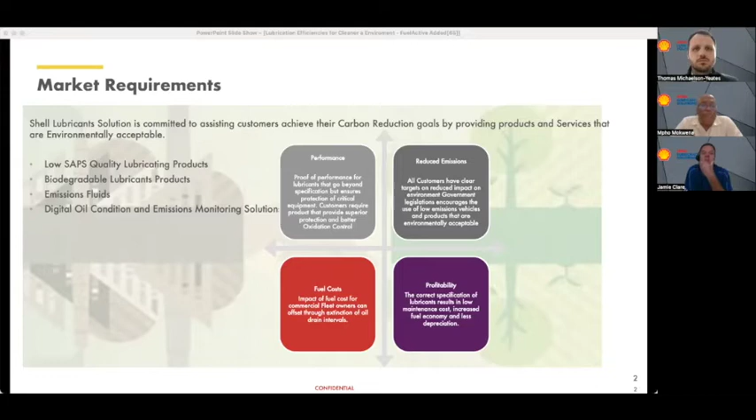As Shell Lubricant Solutions, we are committed to assisting our customers to operate efficiently and optimally, whilst also maintaining performance, reducing emissions to help them achieve their sustainability goals, and maintaining profitability, which is very key in the current economic climate we find ourselves in. And the rising fuel cost means that customers are constantly looking for other areas where they could record some savings. Shannon, if you can move to the next slide.

In Shell Lubricant Solutions, we have solutions that support our customers' operations to operate optimally and sustainably while reducing their total cost of ownership. Core to Shell Lubricant Solutions, we have a portfolio of services that addresses specific problems or specific challenges that our customers face on a daily basis. And this starts with the packaging of our products. So we have products that have a net zero carbon footprint in terms of packaging and also the formulations thereof.

Our packaging solutions mean our customers can claim the carbon reduction points that result from using carbon neutral packaging and solutions. Our services solutions are designed specifically to enhance global lubricants best practice and reduce oil and grease consumption. This also improves the customer's bottom line by improving their profitability. Very important for all our customers is to always have their equipment available for production and operations. So through Shell Lubricant Solutions, we are able to provide solutions that improve machine availability and reliability.

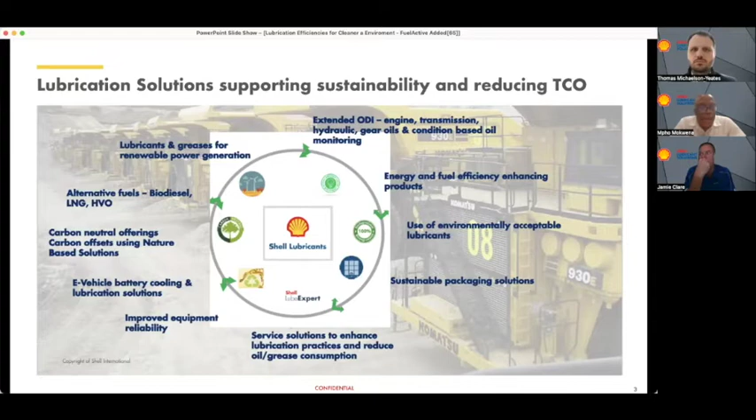Thanks guys. My name's Jamie, based in London in the UK, and I work as part of a global team. My current role is product application specialist for services. So to give you a quick recap, the way Shell are working at the moment is we're moving away from just being an oil supplier. We want to work more closely with our global and key account customers to look at not just selling you an oil, but also selling you a service. And essentially the whole thing is underpinned by sustainability.

A key lever for this is essentially trying to work with customers to move away from what we call historical or normal OEM limits for oil drain intervals. And yet the whole digital solution space is moving very quickly. This is only an area I've been involved in the last couple of years. Before that, we were more focused purely just on the lubricant.

As Mpho briefly discussed there, we've been working closely with engine manufacturers as an example to see how we can drive down viscosity limits to really push our products to the next generation. We all know that rising fuel costs are causing our customers real problems. So essentially what we've done now is we've got the lubrication nearly as close as we can to the limit in terms of increased fuel economy, but also underpinning that by giving customers still the same level of wear protection, which is quite difficult.

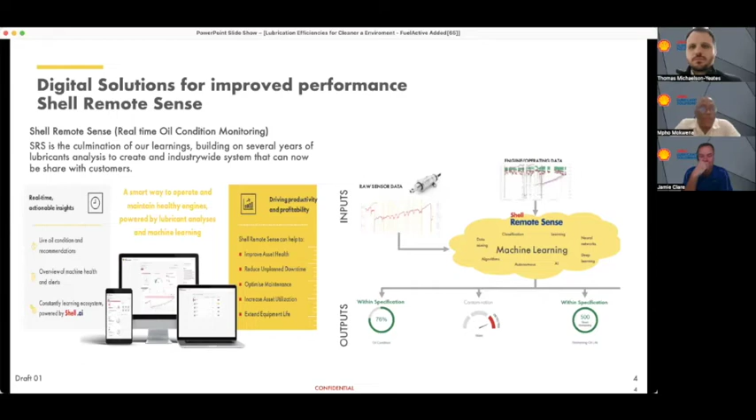I think we'll move to the next slide, which speaks to pretty much the same concept, but with emissions management. Also a solution that we're working hand in hand with one of our partners, Oren, to provide emissions management solutions. This is also very data-driven, in the sense that sensors are installed in the customer's operation to check what their daily emissions are, and we help them manage their emissions and carbon footprint, and also help achieve their sustainability objectives.

It's been tested through various customers globally, and it's something that we're also bringing into the South African market. As I said, this is in collaboration with Oren and IBM, a partnership that was established a couple of years ago. And this also addresses the need for customers and operations to go digital in terms of managing most of their operations. So we're moving into that space as well, to try and minimize as much as possible human interventions when it comes to emissions control.

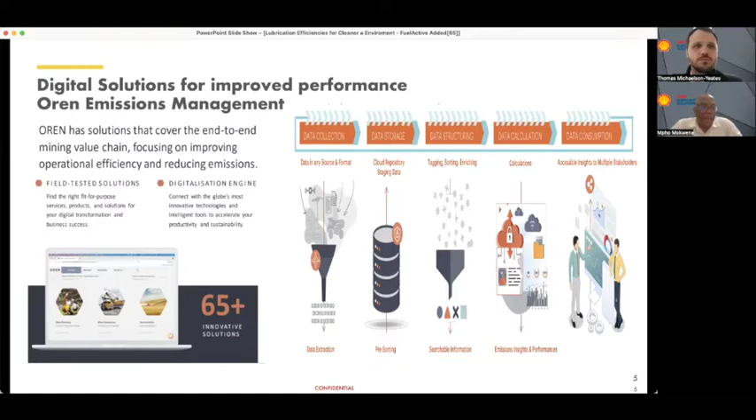Shannon, you can move to the next slide. As I said in the beginning, we're going to unpack some of the solutions. So far, we've unpacked two of our digital monitoring solutions in terms of emissions and oil condition monitoring. But all this works in support of what our core service is, which is the provision of lubricants.

The latest technology now in the market in terms of lubrication is our Rimula brand, which now has a CK4 specification. It's also carbon neutral in terms of packaging, formulation, and raw materials. This product has been in our portfolio for quite a while now, and it has been tested to reduce oxidation and oil consumption by about 39%.

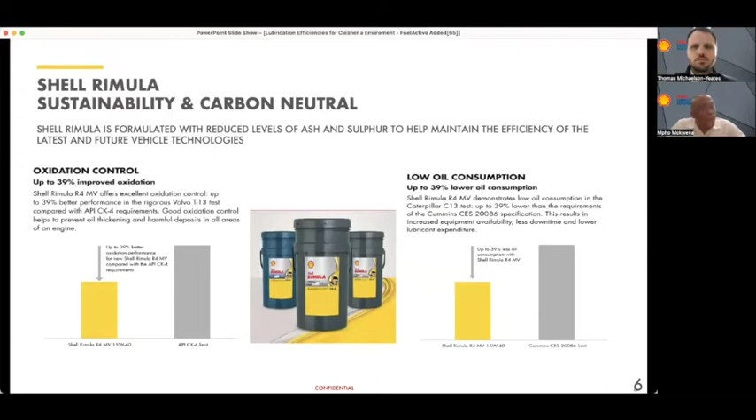In collaboration with our OEM partners, Volvo and CAT, we were able to do these tests, the oxidation and consumption test. Shell Rimula is also available within our portfolio. You can move to the next slide, Shannon.

Again, as we mentioned right in the beginning, our solutions are underpinned by the need to reduce our carbon footprint and be sustainable in our operations.

We all know oil, if it's not managed properly, 50% of it ends up in the environment, either through water streams or into the soil.

And this is why now we're introducing an environmentally acceptable range of lubricants, which is completely biodegradable, Shell Naturelle.

Essentially, all products that are in our portfolio, be it engine oil, transmission, or hydraulics, we have a biodegradable equivalence of this, and this helps our customers to alleviate the pressure of wanting to deliver more, whilst also contributing to a more sustainable and optimal operation.

Our products in the Naturelle range, as I said, are completely biodegradable, and are less flammable and less harmful to plants, animals, or water streams, where they might end up if not managed properly.

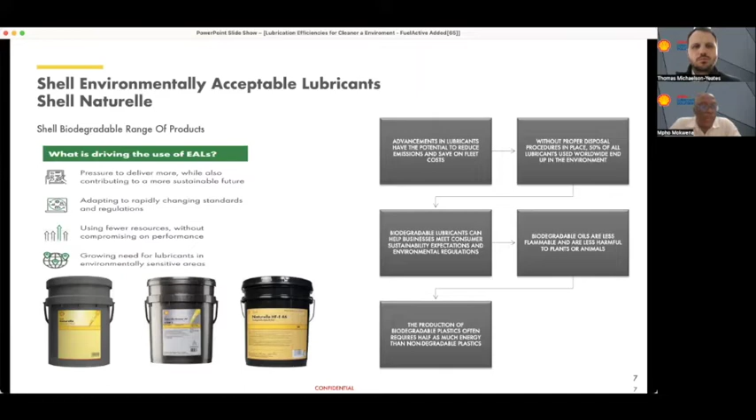Another product that's within our portfolio, I've also mentioned in the beginning, is our Emission Fluid. As you may know, most of the new technology diesel engines come fitted with the SCR, which seeks to reduce their emissions.

How AdBlue works is that it's injected directly onto the emission system of an engine, and it converts those harmful emissions into harmless water vapor.

AdBlue has been introduced since the introduction of Euro 5 and Euro 6 engines in the market. So we also help our customers through this product to reduce their nitrogen and carbon emissions.

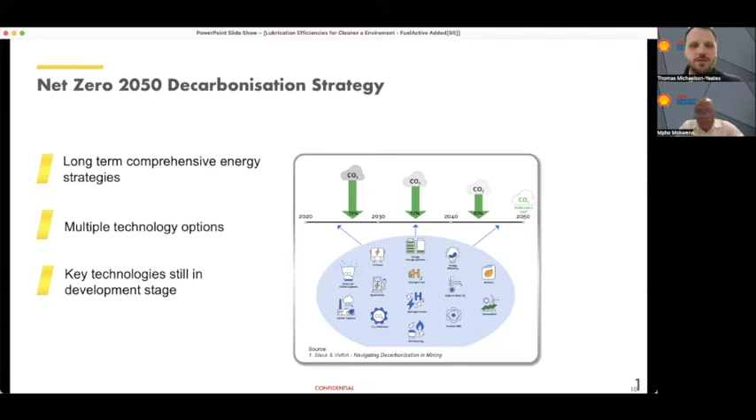It's interesting and important to understand that though these technologies at the moment are being piloted and tested, and they'll be available to be rolled out commercially before the net zero goal of 2050, they're still in development. So what we've got to do, it's still important to look at where we are today with the diesel, fuel and energy situation in mining.

And it would be pretty similar to any mine in South Africa, if you looked at Sishen or Mogalakwena or any other mine, that if you look at what is the main energy source on a mine, it is diesel, predominantly in the mobile assets, such as the loading and hauling phase.

As we speak at the moment, according to a McKinsey study, we've got roughly just over 50,000 90-ton diesel haul trucks around the world operating in mining and other industries.

So when we look at what we need to achieve as an industry in mining to get all those trucks over from diesel into completely net zero technologies such as hydrogen, we understand the task that we've got on our hands. But we also understand that actually that's not going to happen overnight.

If you take Australia as an example, in the Pilbara region, the diesel that's burned annually is the equivalent of 600 million trees. So if we leave that for 20, 25 years as we move to hydrogen and don't look at other technologies, such as the ones we've been discussing today, to reduce that, then we're still seeing a massive effect on the environment.

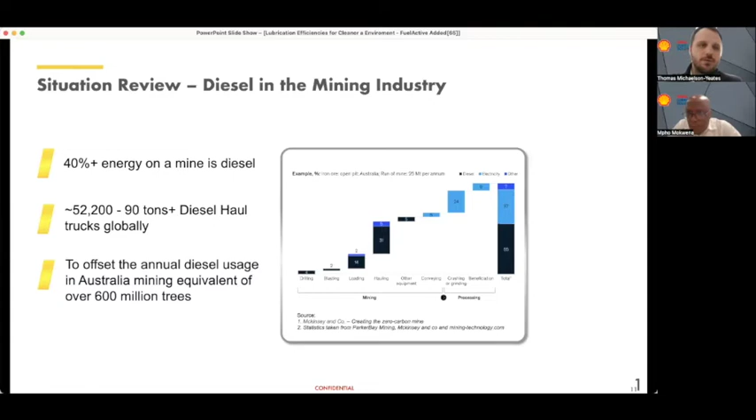And if we just flip to the next slide. So for me, to understand how we look at decarbonisation, we've got to look at it in two ways. One is obviously what all mines are doing at the moment, looking long term at how we accelerate these technologies that bring us to net zero, such as hydrogen, solar, etc. But also short term, how do we look at different technologies, be it mechanical, chemical, digital, to help us reduce the impact of burning diesel?

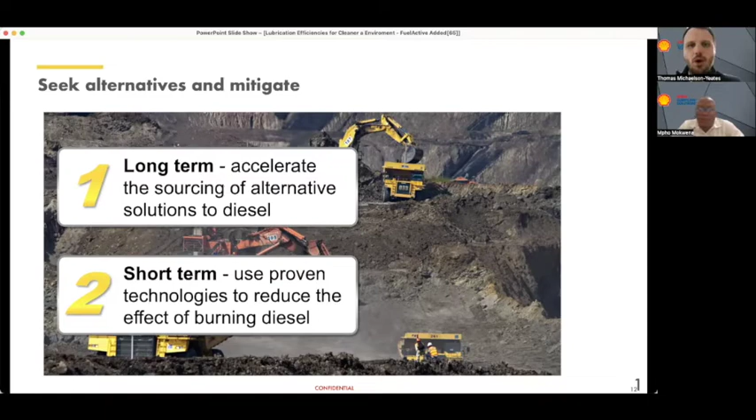If we flick to the next slide. I'm sure there'll be arguments from people that would add other buckets to this, but I kind of put them into three main buckets. The first one being different fuel sources that are available today, and that was discussed earlier on the webinar. There's biodiesel, and many others available today that I know Shell are selling to different companies in countries around the world at the moment, and the benefits that they have above just diesel.

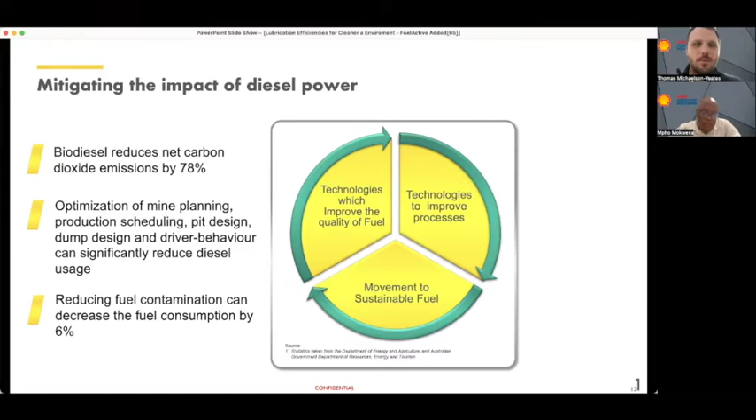Then you've got how can you make operational changes on the mine? That might be a digital solution such as driver behavior, remote sense, to trolley systems on a mine, and anything you can change to actually change the process on a mine. And then the last one is how can you look at the quality? How can you make sure the quality of fuel that's going into the engine is at the highest spec, therefore meaning that you actually have to burn the least amount of it to deliver exactly the same output. And from a FuelActive perspective, that third bucket is where we sit.

And if you just flick to the next slide. So just to zoom in here from a technical perspective, if you look in the top left picture, what you're looking at is a new injector. And on the top right, you're looking at basically a worn injector, but not an injector that you would probably replace on a mine, because otherwise you'd be replacing injectors every 1,000 hours, and that's not financially viable on a mine, because your equipment would be down all the time. However, because of the contaminants from water and dust and other things that get onto a mine, what you're seeing is that's happening too quickly.

And when you're getting an injector that's having small levels of contamination in it, what you see is it doesn't run to its optimum level. And when an injector doesn't run to its optimum level, it doesn't mix, it doesn't evaporate, it doesn't combust, which means that to get the same level of output on your equipment, you're actually having to burn more fuel.

And the outcome of having to push more fuel through it is, one, obviously your fuel cost goes up because there's more of it. Two, the big one today, from a decarbonisation perspective, you're actually burning more fuel, which means you're putting more into the atmosphere. And the third one, you could get a power decrease on your equipment, and the only way you overcome that is putting more fuel through it, which goes back to the first problem.

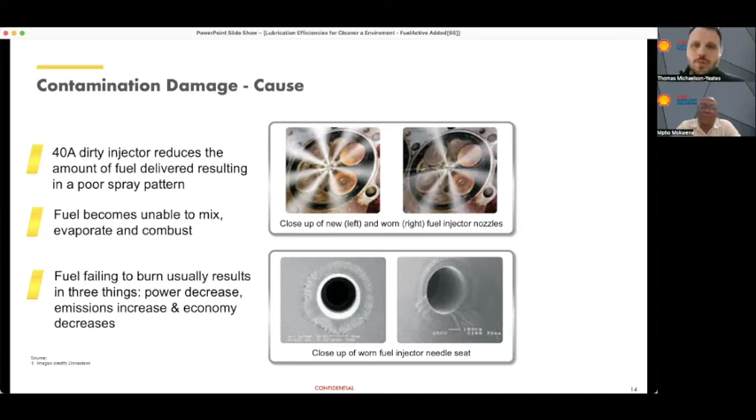If you flick to the next slide. Normally I'd show this in a video, but for the webinar today I'll just talk through where FuelActive sits and what we look to do. If you look in the first box, what you're seeing there is a standard fuel tank and the breakout of fuel within a fuel tank. At the bottom, what you get on a mine, even with really incredible fuel management processes at large mines and customers around Africa and across the world, is that you do struggle to remove all forms of contaminants, such as dust, dirt, rust that you see in the mining industry. And the next layer up, what you see is water.

Water can come in via weather, but the main way water comes in is via the temperature difference between inside the fuel tank and outside the fuel tank, creating condensation inside the tank. And however strong a fuel management process is on the mine, that is near impossible to remove. And then on top, you have the cleanest fuel. And even during the high levels of agitation that you get with mining, moving vehicles, and happy to send this over to anyone after the webinar, it's still really interesting to see how that clear difference sits between the water and diesel due to the weight difference.

In the second picture, what you're seeing is a standard fuel pipe that generally comes from the top of the tank and sits within a few centimeters of the bottom of the tank. With a standard fuel pickup pipe, because it's basically like a straw, it creates that pressure point around the bottom of it. By creating that pressure point, it always sucks from the bottom of the tank and sucks the heaviest material into the fuel line, which means that even when you're looking at a diesel tank which has predominantly 99% clean fuel in it, and only the bottom 1% has a level of water and contaminants in it, that's the first material you always suck up into your fuel line.

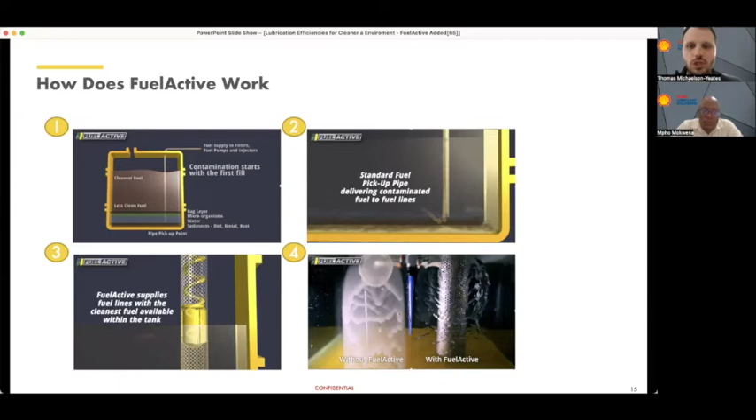And then on number 4, what you're looking at there is, in our innovation centre in the UK, we have a large fish bowl, and in the same fuel, you've got a FuelActive unit and a non-FuelActive unit. It's a bit of a Pepsi challenge in the sense that it shows, if you had contaminated fuel in the tank, what FuelActive would pull out and what a non-FuelActive unit would pull out, and you can see there the difference in the quality as we spray the fuel against the glass between the two. Happy to show this again to anyone that's interested, from a video perspective or from an agitation perspective. It's very interesting. It shows the same.

If you just flick to the next slide. So from a FuelActive perspective, even as the units get bigger in the bigger mining vehicles, the basis of the technology is very simple. You take those 4 key components. You've got the baffle tube that protects and guides the float. You've got the fuel float, which is broken up into 2 parts: the bottom is the diesel reservoir, which prevents any form of fuel starvation, and the top part is the air pocket, which means it always floats at equilibrium on top of the diesel available. Then you've got the hose, which means the float moves up and down. And then you've got the top plate that connects into the fuel line, so there's no need to cut any fuel line. It's just a straight connection.

FuelActive is simple because it's got no maintenance. Once you fit FuelActive, it's fit and forget. We provide a 5-year warranty on all installations of FuelActive, and we've got units that have been installed for 10 plus years in different mining vehicles across the world. As I said, very simple and robust, which makes it perfect for heavy industries such as mining, with a long operational life. And as you can see in the pictures, FuelActive can be installed on anything from a small 20 kVA generator all the way up to multiple large haul trucks across the world. Just flick to the next slide.

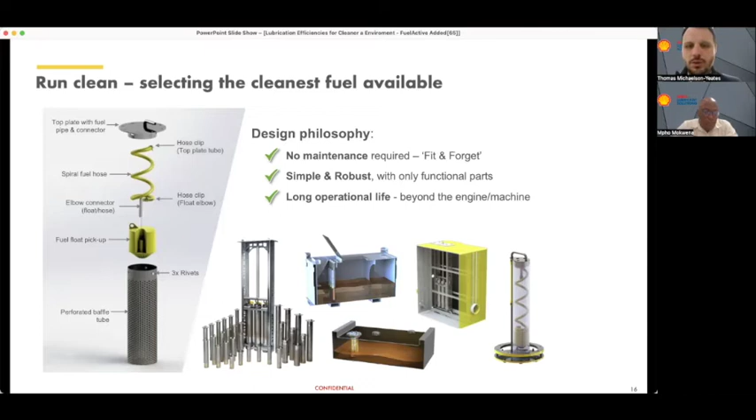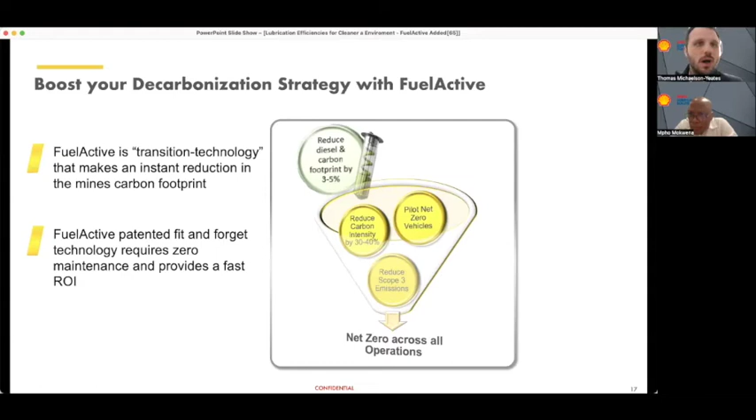So if we take that back to a decarbonisation perspective, if anyone has spent time looking at different mining decarbonisation strategies, some are more aggressive than others, but they generally fit into the same remit of piloting net zero vehicles, reducing carbon intensity, hitting scope emissions. We see FuelActive as a transitional technology, in the sense that it's important to not only look at what is coming onto the market in the next 5 to 10 years, but what we can do now to reduce the diesel impact of our mobile and fixed equipment on a mine, by reducing carbon emissions but also reducing fuel usage. You get an environmental benefit from reducing your carbon footprint, but also a very strong ROI from reducing the high cost of fuel at the moment. If you flick to the next slide.

So just to end my short presentation, I thought I'd add a couple of case studies. I've picked 2 case studies, albeit they're not in Africa, because I thought these 2 summed up the market a bit stronger, in the sense that I picked one which is very large, one of the largest copper mines on the planet, and the next one that I'll have a quick chat through is actually a very small gold mine, just to show how we work with both sides of the market.

This one here, we worked in partnership with Komatsu Cummins in Chile, and it was looking at the new Komatsu 930 truck, and Cummins fitting their new QSK 78 engine. With these new stage engines, the quality of fuel that's going into the engines is vital. And with poor quality fuel, what they found is obviously that you get downtime on the equipment. So we installed FuelActive on these new units with the goal of delivering cleaner fuel, which meant increased fuel filter lives, and hopefully also providing a fuel efficiency benefit.

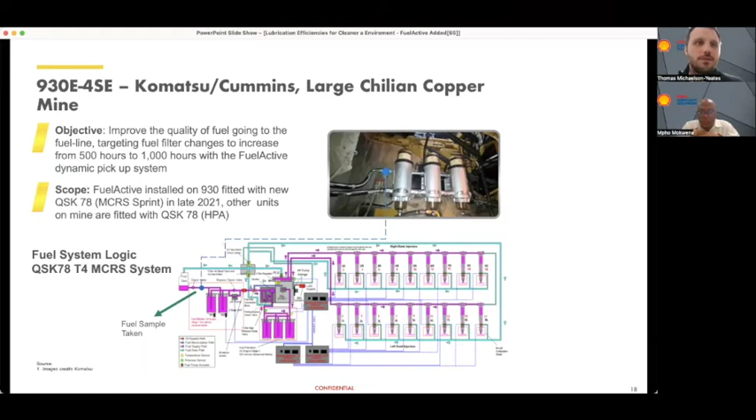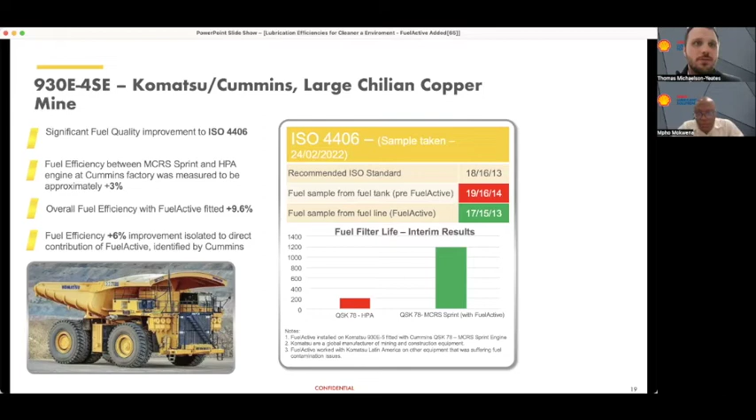One, from a fuel efficiency perspective, Cummins expected to see about a 3% benefit. What we saw was a 9.6% benefit across their fuel efficiency, of which, according to the Cummins statistics, they believe 6% was assigned to FuelActive delivering that cleaner fuel. But also, for a copper mine of this size, the increase in fuel filter life. We tested at 1,200 hours for 3 months, and now we've stuck at 1,000 hours. So it's a big increase in fuel filter life, which means the trucks don't have to come in for fuel maintenance as regularly. If you flick to the next slide.

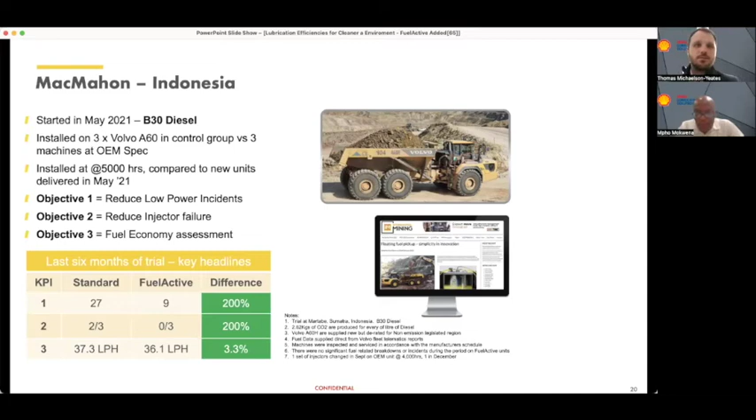To all our attendees, as you would have noticed, we're moving away from just being a product supplier to end-to-end solutions, where we work together with our customers to customize solutions specific to their applications. And central to all solutions that we provide is sustainability and reduced carbon footprint. So we look to partner with customers in different sectors, mining, construction, and power, to provide those end-to-end solutions that take away the pain of managing their oiling application.